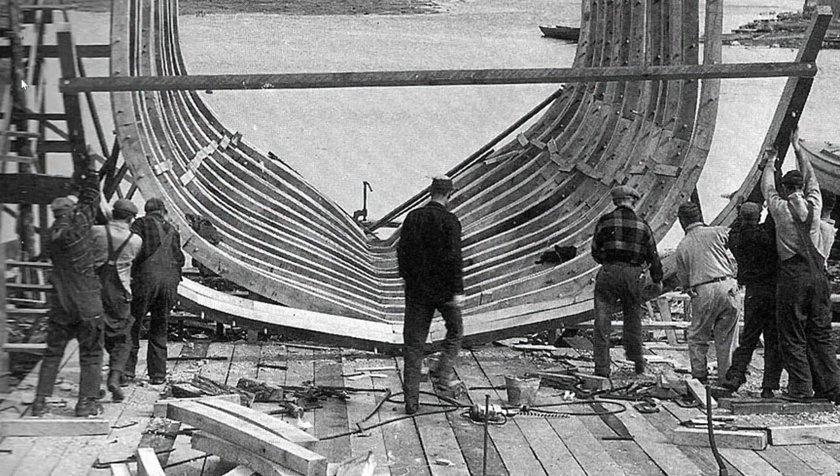Now, shipbuilding itself is one of the more inefficient construction projects you can undertake. It's more like building a building than a vehicle because it kind of has to stay in one place. Doesn't move much. Hard to use the assembly line method. We'll talk a little bit about that later.

And so you have a carrier protected by a bunch of smaller ships, Aegis ships, which are designed to shoot down a large barrage of incoming missiles. But what you're seeing these days, now that the Cold War is over, is there's still the need to protect those carriers. They're a golden target for many regimes, but you also have all these hot spots popping up, smaller scale conflicts, piracy, threats to international freedom of seas, and ballistic missile threats.

And to handle all these missions, basically we're having to peel off these small ships like destroyers and cruisers from carrier protection and have them go into all these different parts of the world to conduct their missions. Humanitarian, that's another big one. And what we're quickly realizing is that we don't have enough ships to meet all the needs that we want for the Navy to meet. One of the big reasons for this is we retired the Perry-class frigates, part of the Cold War, but now they're obsolete. All of those were retired, the last of them in 2015.

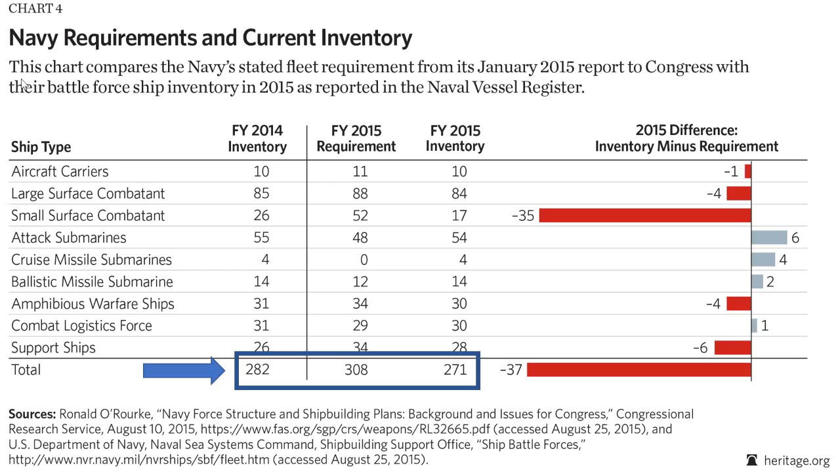Added to that is President Trump's commitment to build up the military. He wants 350 ships. And so the Navy's planning for 355 ships. You look here, you see the large surface combatants, small surface combatants. Those are the ones that are going to be filling this kind of more versatile role of patrol.

Now, the ships that we kind of had coming up to replace our current small ships are the DDG-1000. This thing was really amazing in concept, but turned out to be a giant lemon. Over budget, tried to put way too much technology on it, and very difficult to manufacture, so they're only going to make 3. That's not going to help with the 40 plus that we need.

They were hoping that the littoral combat ships would fill that role, but they also are over budget, over complicated, and the other thing is they are designed to run on a skeleton crew. The problem with that is you kind of need a minimum amount of sailors to keep a ship functioning if that ship stays at sea for like 6 months at a time. They got to maintain the ship, chip off rust, repaint it, maintain the engines, all that good stuff, and you really can't do that with the numbers that they designed the ship for. So what they're doing instead is they're trying to build more of our Arleigh Burke class destroyers.

We've already kind of got a production line for that. And then, of course, we'll always be building more of our aircraft carriers. There's the Ford undergoing sea trials. All this translates to a huge need to put out ships more efficiently to replenish the fleet.

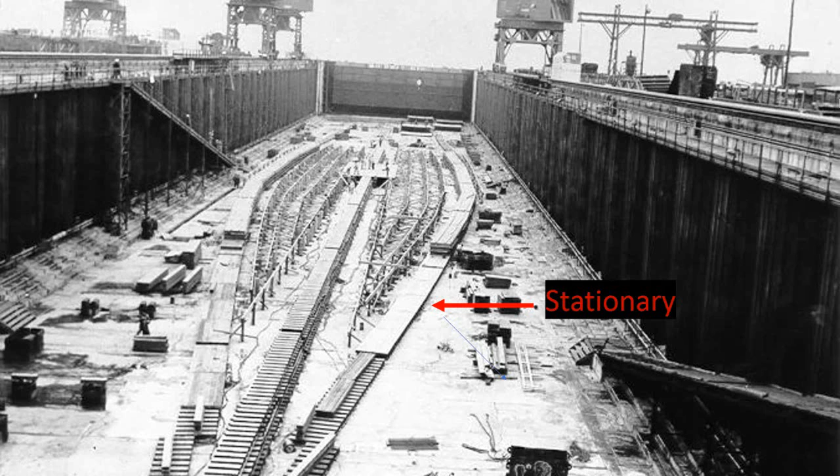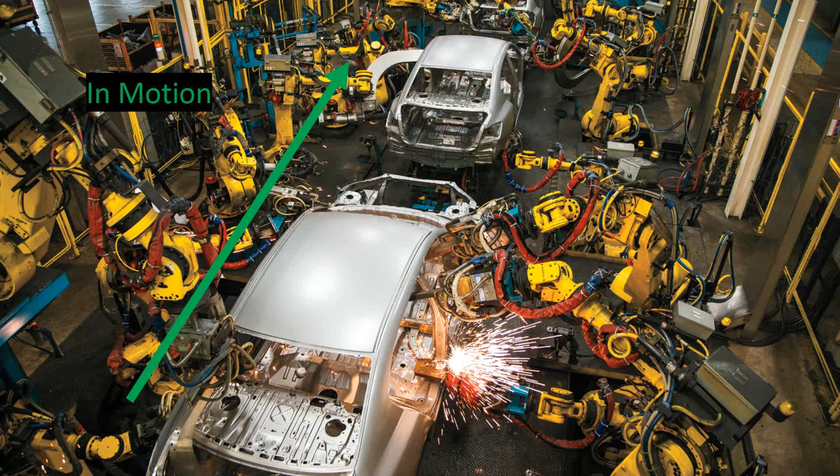So what are some things that make this industry so inefficient? One of them is, as you see here, the keel is laid and the project basically becomes stationary. You have to have an army of workers crawl on it, inside it. This is a far cry from the more efficient assembly line method that the automotive industry uses, where you have the goods basically going down a track, passing stations where the stations, whether they're robotic or human, conduct repetitive tasks.

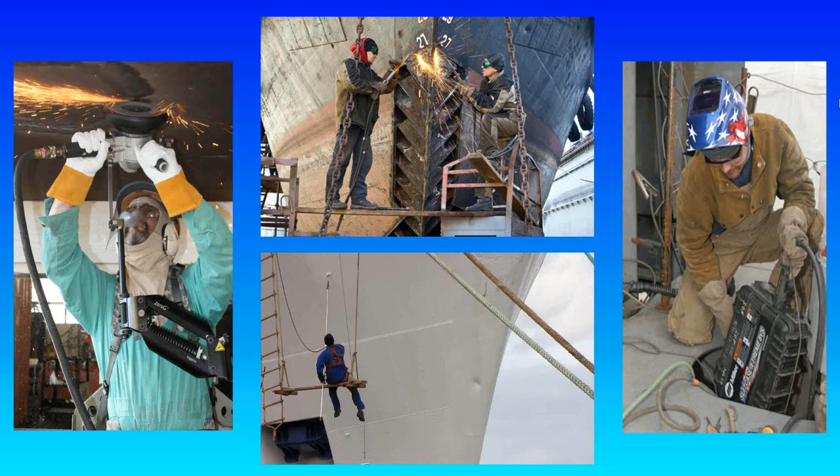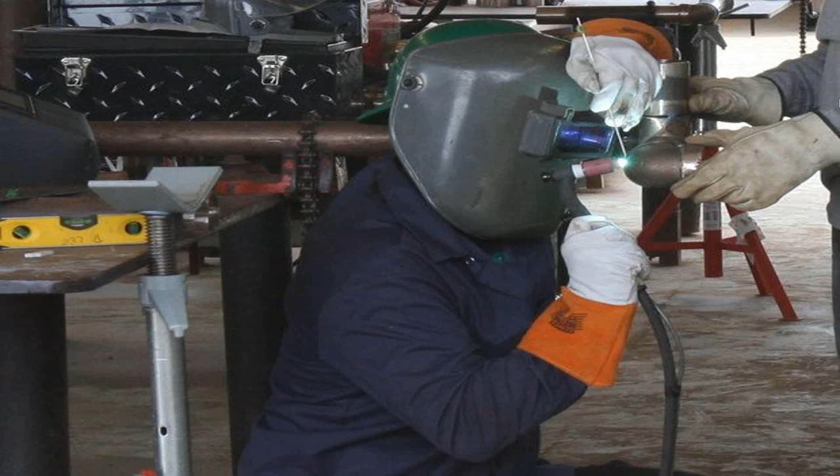Instead, you have really highly skilled workers having to jam themselves in all kinds of positions, get in harnesses and go down the side or down the middle even, or crawl into tight spaces, lower their gear into tight spaces. Very, very labor intensive, this effort to build a ship. And on top of that, you really have to have skilled personnel. A lot of them have to be masters of their trade. And this means that they're expensive and they're very hard to train.

Another difficulty is that at the shipyard, you have parts being ordered from all over the country, kind of in a haphazard manner, from all kinds of different companies and delivery services. So any number of the parts can have defects or be late. And if it's a critical part, that's going to down your whole project and set it behind while you order a replacement. It's very, very easy for problems to arise this way.

Another problem is just the way our government handles shipbuilding. They don't really run it like a business. The biggest example that comes to mind is they require a 30-year plan to be put out for all naval shipbuilding needs in the next 30 years, but then they basically change that every year. So you have this huge overhead cost of coming up with this huge plan, and it changes every year. Not only does it waste money making the plan, but when people try to follow the plan, there's all kinds of confusion and inefficiency that follows. It just adds to the problem.

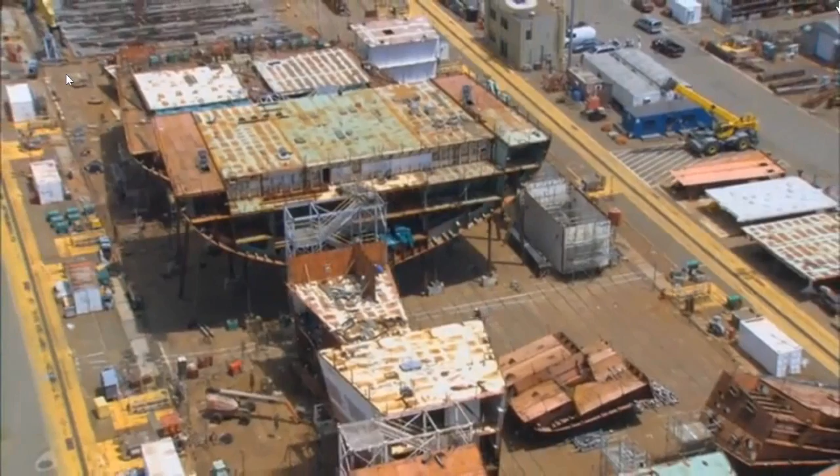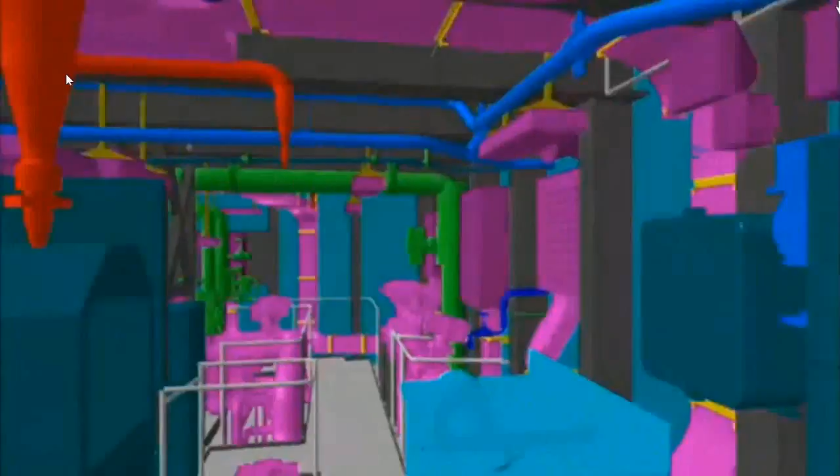So what are some solutions that can help our naval shipbuilding industry? Well, the first thing we can do is learn from commercial shipbuilders. The commercial shipbuilding industry is dominated by Asian shipbuilders. China, South Korea, Japan, they pretty much own the market. Nobody else even comes close, including the U.S. They, for a very long time, have used computer-aided design to plan out their ships. This seems almost second nature now, but the fact is that this is only just recently catching on in naval shipbuilding.

The predecessor of the Gerald Ford was done in pen and ink. They would draw the drawings in ink and vellum. The problem with the ink and vellum was the guy designing the piping system would pretty much design in a vacuum. He wouldn't know what everybody else was doing. And that's exactly what the 3D product model gives you: you get all of the systems in the space at one time, and you start to see where the systems interact and where there are fouls.

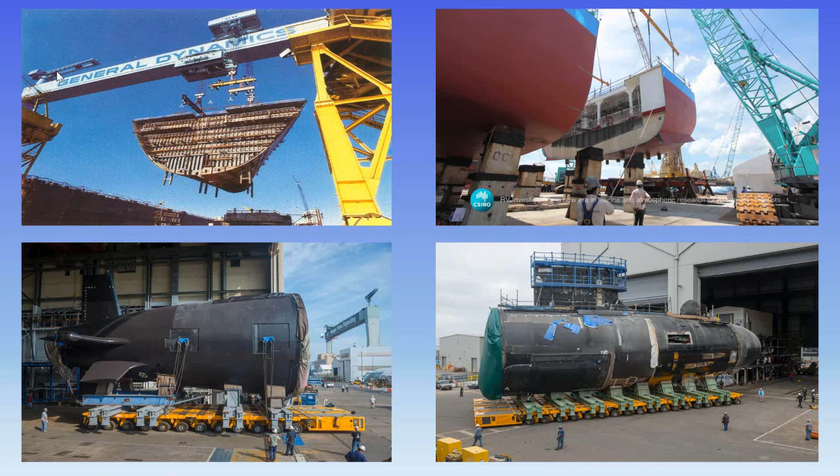Okay. So one big solution to increasing shipbuilding efficiency is this concept of modular design. Basically, you're building the ship in different sections. These sections can be completed even by different companies or in different shipyards, and then they're attached together very easily compared to how it was done before, to form the final product. This has many benefits. One of them is it allows for specialization.

When you're a company devoted to one section, you can really concentrate on that. You can really specialize your workers and not have to have the master workers. And if you're specializing in one area, you have a greater learning curve. You can also train people across different yards on this one section, and you can outsource to companies that specialize in this kind of thing. All this really increases efficiency.

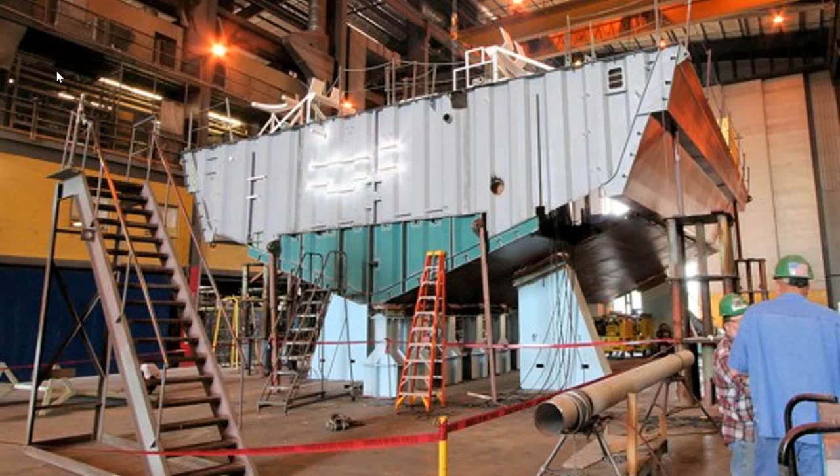In fact, one of the key companies that I found that's really embracing this method is Marinette Marine Corporation. They build those notorious littoral combat ships that are over budget, but they've really spent a lot of money trying to bring the assembly line method into their shipbuilding so that they can improve the process. This modular shipbuilding is a huge part of this.

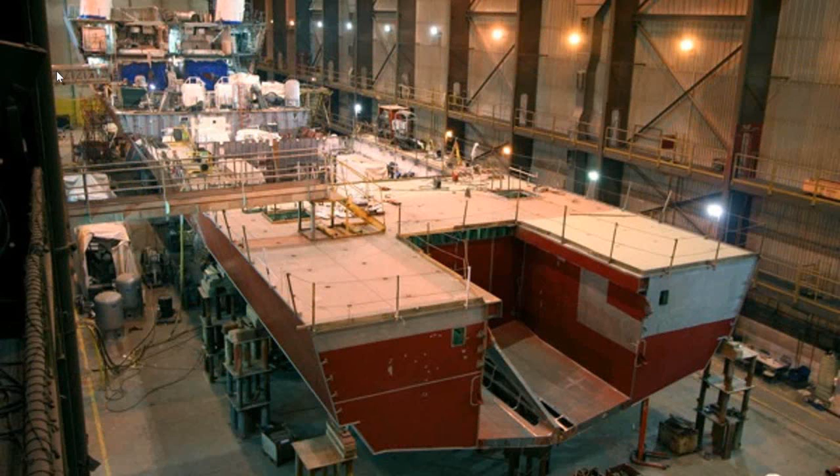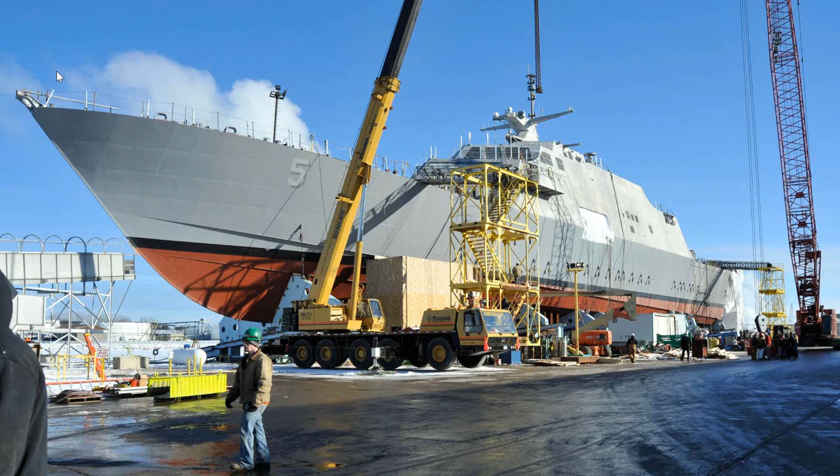They basically have one building where they start all their fabrication, all their highly detailed components. Those move into another building where they're put together in modules, and then they move into another building where the modules are joined together. Basically the only thing limiting them right now is the crane size, which they plan to upgrade. With bigger cranes, they can construct bigger modules and eventually move them out to the pier much more efficiently.

The president estimates right now they're basically putting out 1.5 ships a year, but with all these improvements, they should be ramping up to about 6 ships a year. And like an assembly line, while one's going out one end, they're already working on one on the front end of the assembly line. And here's an overview of their new complex, all the different buildings they have.

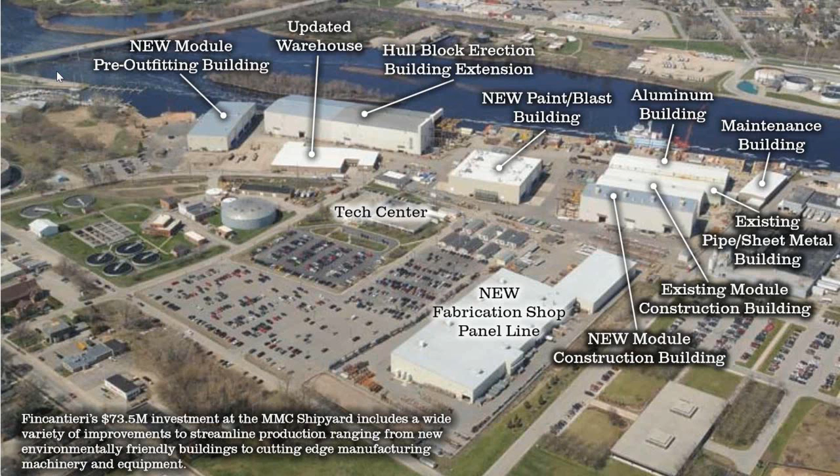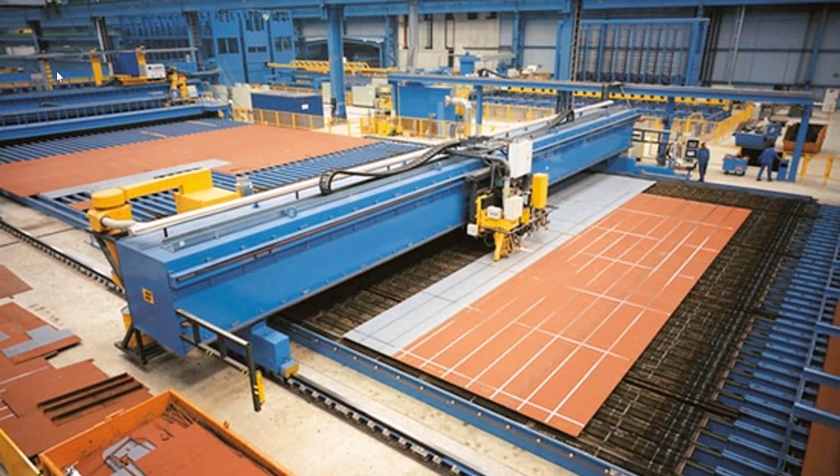Another thing that they're big on is putting automation in the fabrication area. They can have robots do a lot of this welding that workers currently do. They don't even need to fire their workers. They just repurpose them for other things, and they estimate they can double their steel output. The automation can do a lot of the mundane tasks like basic wiring or construction of the frames.

And when you put all this together and you consider the timing of your products, you have something that looks like this, more like an assembly line where you're working on one thing, it moves to the next area, then you're redoing that thing, and it just makes the whole process more efficient.

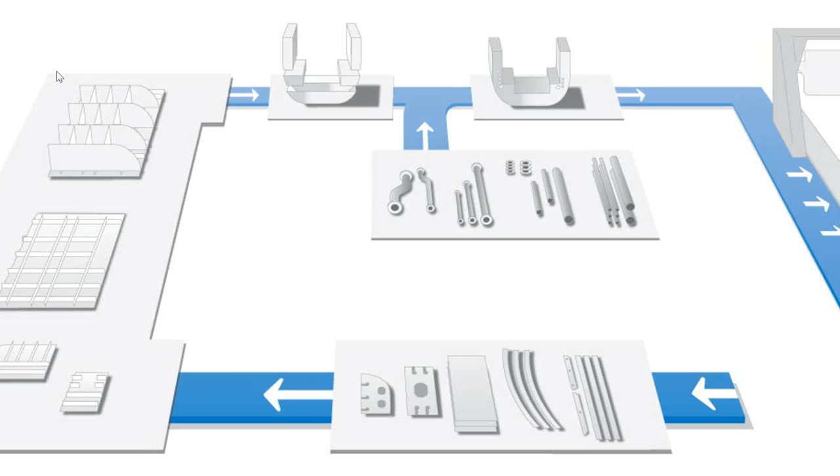Now, timing is a huge thing as well. This is basically the way the process works for building a ship. A delay in any one of these areas puts the whole project off. And basically you got workers sitting there doing nothing, or they get retasked to other things, which translates to higher costs and delays.

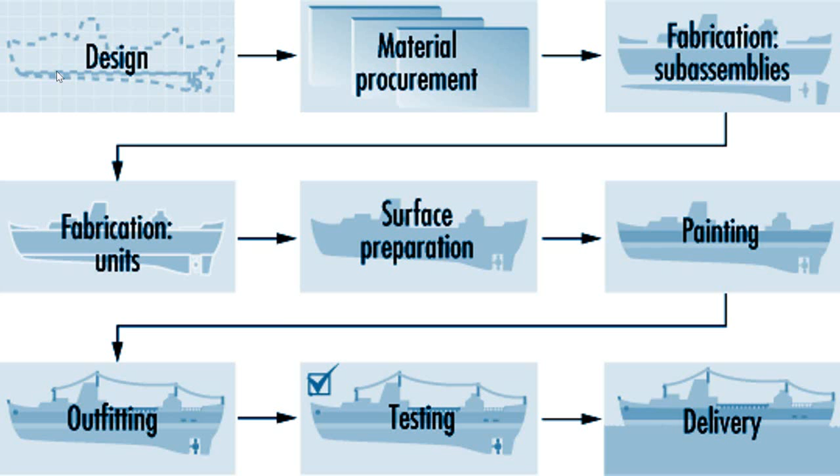And so if you can really work on your timing, getting everything timed so that, for example, they prefabricate a lot of their hot work so that you don't have to go back and do it later. Every time you have to go back and do hot work later, like welding, then you have to repaint and all that stuff. Well, they try to get it all out of the way at once in all the different areas, so when the time comes to paint the ship, they only have to do it once. So with timing and automation and modular shipbuilding, you can really start making this process more efficient.

Now, another area that they've really been looking at is something that's near and dear to our hearts, lean manufacturing and Six Sigma. Lean manufacturing focuses on cutting out all the things in the supply line that don't have any value and just add waste, whereas Six Sigma seeks to reduce variation and improve the quality. And if you fuse the two together, you get this concept called Lean Sigma, which improves the quality, the delivery time, and basically the efficiency of your supply chain all at once.

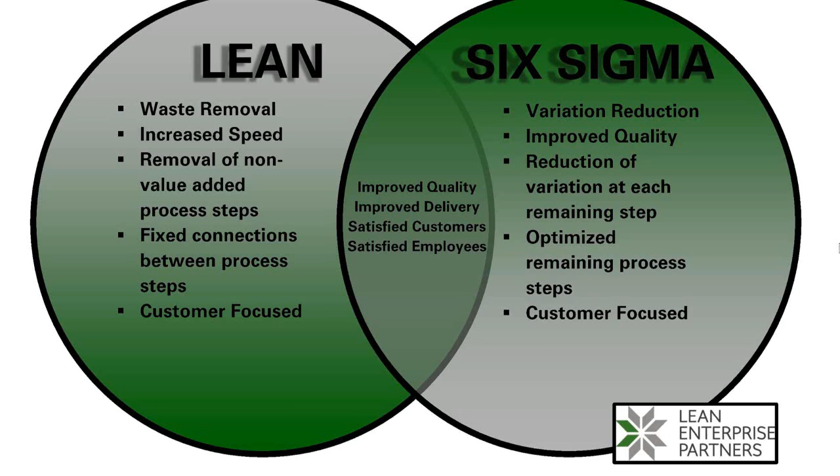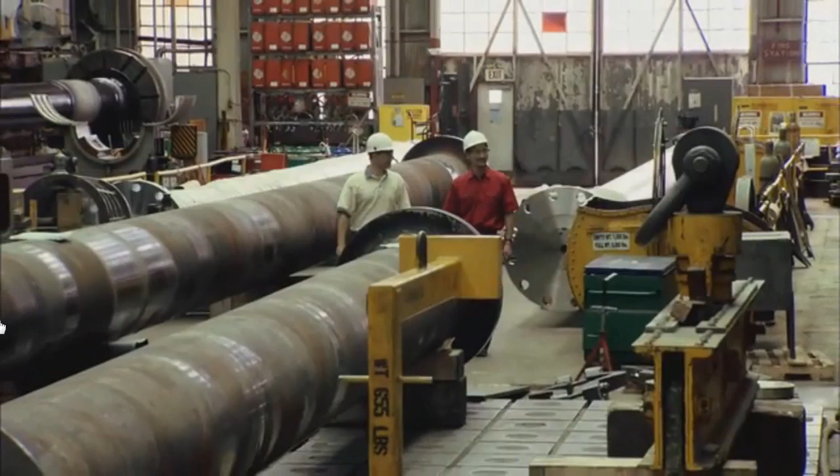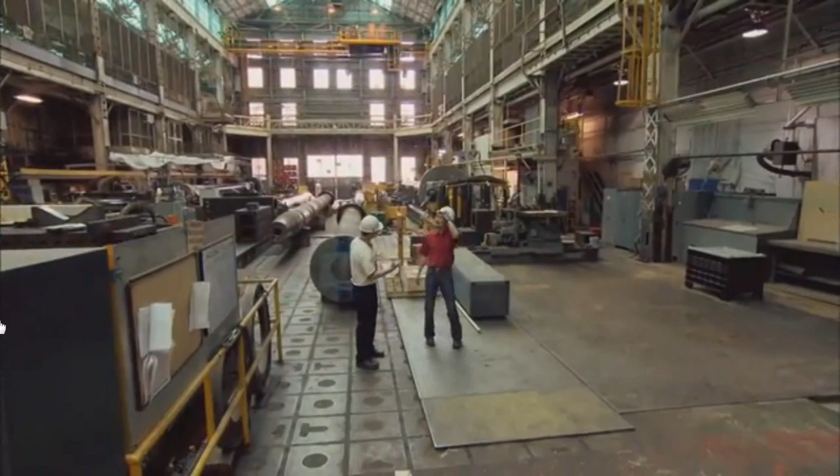The end product being better, more reliable ships that have less variation in their components, and higher quality, all coming cheaper and quicker. Engineer Tim Schweitzer is working to change the shipyard by using the same approach as Toyota, a philosophy called lean manufacturing. It's a term that came out of the car industry, but to us, it's all about trying to identify and cut out as much waste as you can to lower your costs and improve the efficiency and the speed by which you do your work. So basically, you're trying to get rid of all the fat in the whole process.

That's exactly right. So what are the things that you're doing now that are different from before? We used to do what we call stick-built carriers, and you build every piece into the dry dock and build the carrier from the bottom up. Now you see we do a lot more modular construction. What Tim's doing is to use the lean philosophy to reinvent the way warships are made.

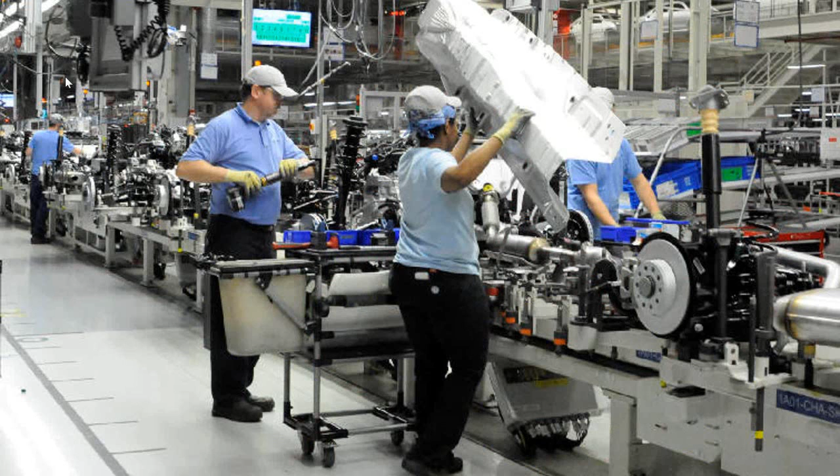So to go ahead and wrap this up, there are many, many opportunities for industrial engineers and technologists in this industry to get on board and make things more efficient. Many of the concepts are already being used by the commercial shipbuilding industry, modular shipbuilding, contracting certain tasks out. I would say that the biggest overarching concept that people ought to keep in mind is the idea of putting your equipment in motion, having it go past the workers, having the workers standing there doing repetitive tasks and not getting tired, and only needing to be trained at that one task, far more efficient than having an army of master shipbuilders.

The other thing that's clear is the need for this. I mean, if any of you guys pay attention to the news, there's a lot of things going on in the world. Piracy, rogue regimes launching their ballistic missiles. You got people trying to take over parts of the ocean, like in the South China Sea, and you need ships to sail through there to tell them, hey, these are still international waters. And then you have Russia doing its thing, and the Middle East. There's going to be a need for ships, and they're going to want them to be cheaper and more affordable. And that's what we do as industrial engineers.

So if anything, maybe this presentation made some people aware of the opportunities that exist here. With that, I will take you on to my bibliography.